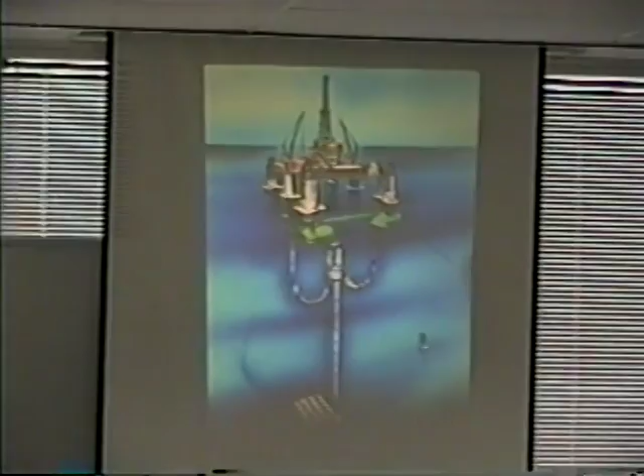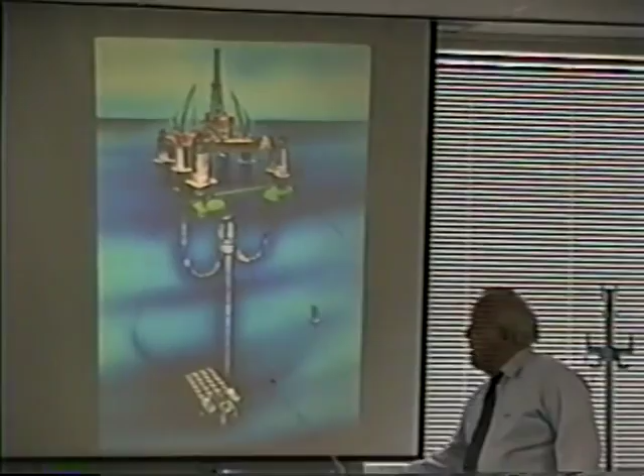It's set in water about 2,100 feet deep. It's a system that drills some wells through a template, and our part then was the 3-mile tie-in to a 3-well template, and to have 6 lines, 6 3.5-inch lines in a 28-inch casing, all insulated, and the umbilical, the hydraulic umbilical and injection lines were in the umbilical.

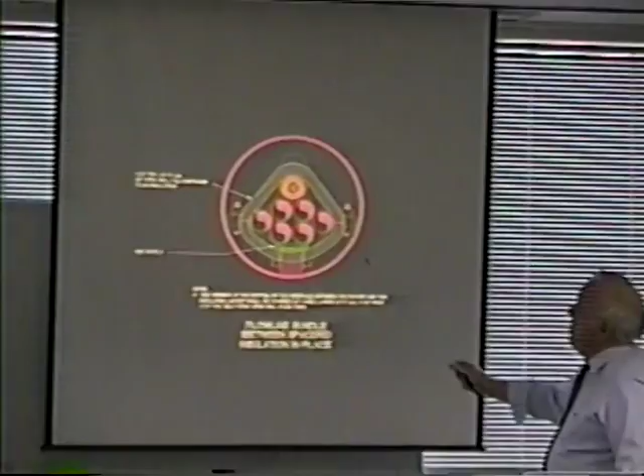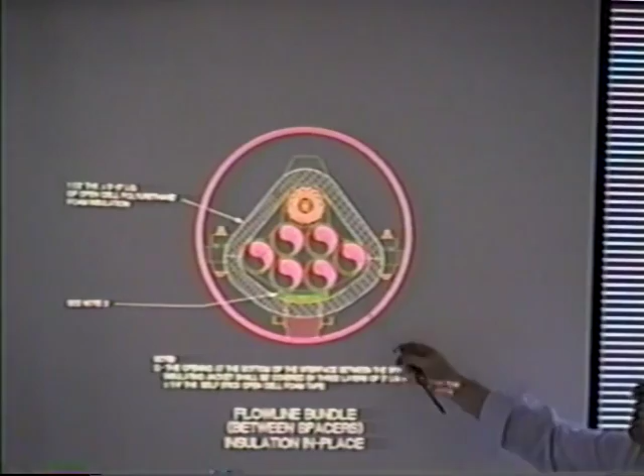The pipe bundle was made up of the 6 lines, like I just described, insulated in a 28-inch casing, and this was a high-pressure system. It's 10,000 psi flow lines, hydraulic umbilical. We had spacers about every 12 meters, roughly, and all of this is then in the 28-inch casing.

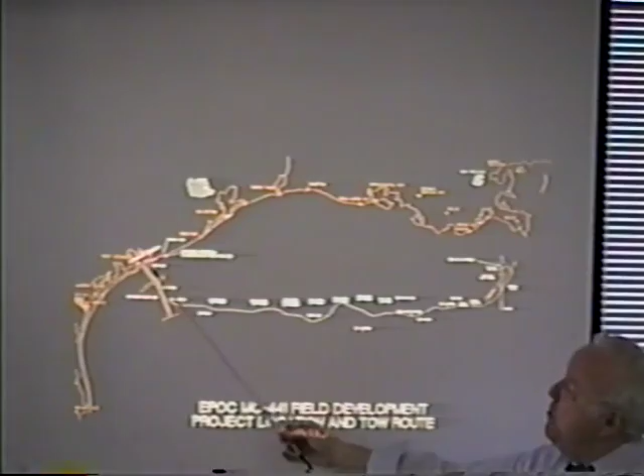We made this up at Matagorda. Port Lavaca sits here, Houston's here, New Orleans is here, and we towed about the equivalent of from Houston to New Orleans, actually a little bit further, about 450 nautical miles was the tow distance.

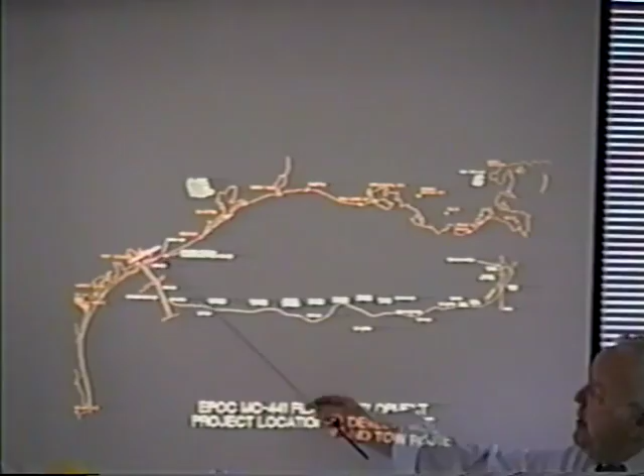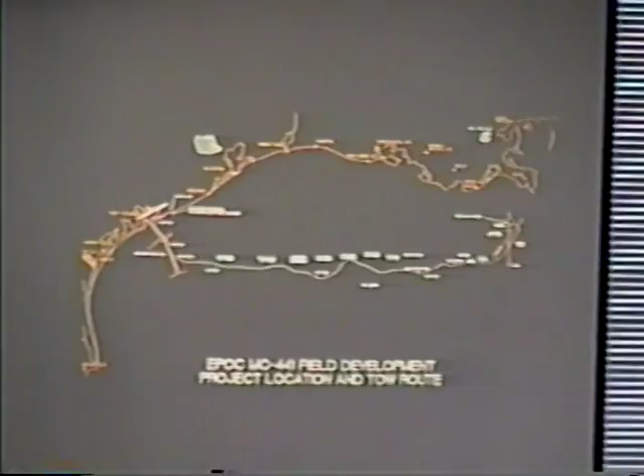The bundle was made up complete. We installed sleds on the ends, you'll see these, and then tested everything in place. After everything was all set, we then towed. It takes us about 3 days to get here. We're traveling at about 6.5 knots on the seabed. We tow everything on the bottom, and we actually passed through water depths of about 3,300 feet of this area, and then arrived in the production area.

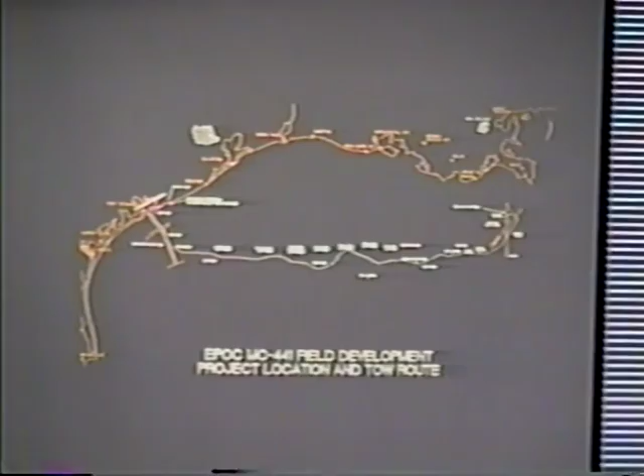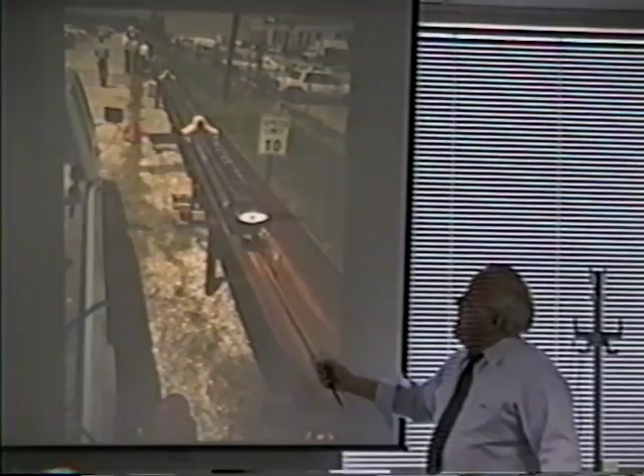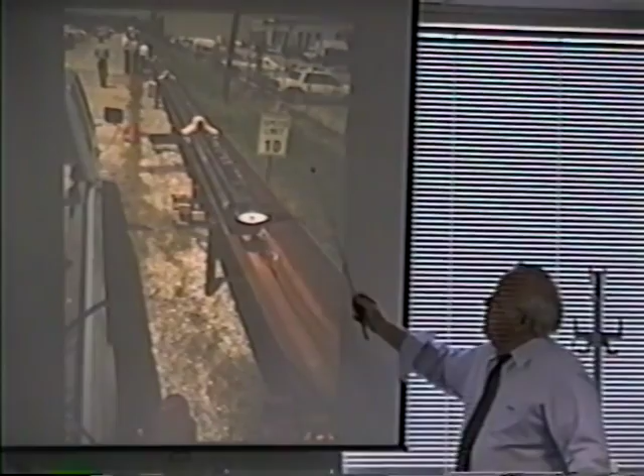Now, to make these up, we have to design special spacers that are about every 12 meters. And this is the test of the spacers. The spacers have wheels on the bottom, and we pull these back and forth on this 1,000-foot long track to test the wheels, make sure it doesn't get unstable, it doesn't roll, and make sure that the wheels hold up. We did not watch the speed limit. We kept everything running at actually about 8.5 knots, which is almost 10 miles per hour. So that was the development of the spacers.

Now, if you tow a pipeline on the seabed, you have to protect the bottom of the pipe, and what we do is we install an abrasion coating on the lower half of the pipe. Now, the advantage is you protect your pipe, and by not installing it on the top part, you save about $27 a foot. And by having the weight on the bottom, then you're stable and the pipe won't roll. So you have several advantages of using that. Actually, we get out to these sites and where the pipes are spanned, we can look underneath, and this abrasion coating holds up extremely well.

What kind of coating are you talking about there? Just say it's epoxy with sand in it, and it's called Seaguard. Seaguard, yeah. But Bob, I was kind of involved in that bit. I think that's in that Sigma coating. Yeah, Sigma, it's a Seaguard. It's a cladding that they put on, I want to say it was like a quarter of an inch thick, something like that. They also use it for boat decks, for walk areas. Right. But it's just epoxy and sand, right? Yeah, epoxy and sand, basically. It's the old Tide Guard too?

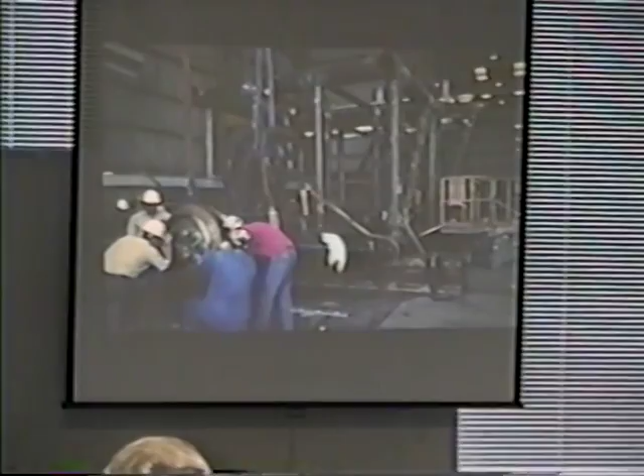Bob, what was the diameter of that 19-mile? It was 32-inch, and we did it the hard way. We put concrete on it, and it was cast concrete on the island of Khargu, right next to Kharg Island. And concrete absorbs water, so we had some very precise measurements to try to get this weight correct. It actually hit the water floating, and then after about an hour, you see it start to sink. You see bubbles coming up as it absorbed water. So we were on a very tight control there. This control is tight, but it's much easier because your steel does not have the absorption that the concrete does, so it's a lot easier to control.

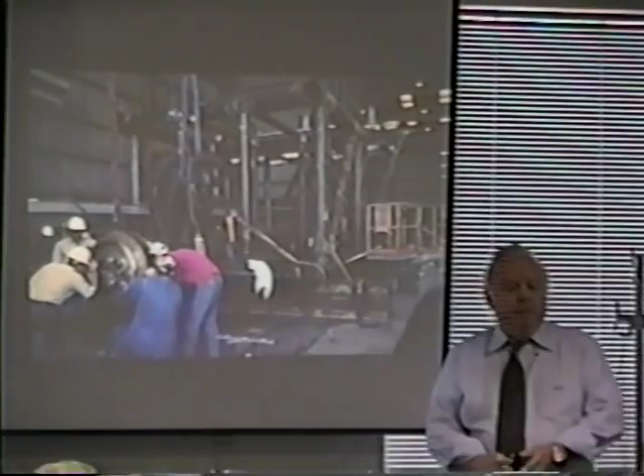Here's a sled on the end of the bundle. The sleds will weigh anywhere from about 12 to 18 tons up to, in this case, 75 tons. And we have installed a sled on the end of the bundle that weighed 140 tons. Now, the reason I bring that up is because we could use that sled then as, say, a 4-well template with some manifolding, where you do everything onshore, test it all, and tow it out, and you're there. Instead of having to carry it all out in pieces with very expensive spreads. Say the J-lay spread around 350,000 a day, and then your spreads to set the templates, to tie them in, it's really tremendous costs offshore.

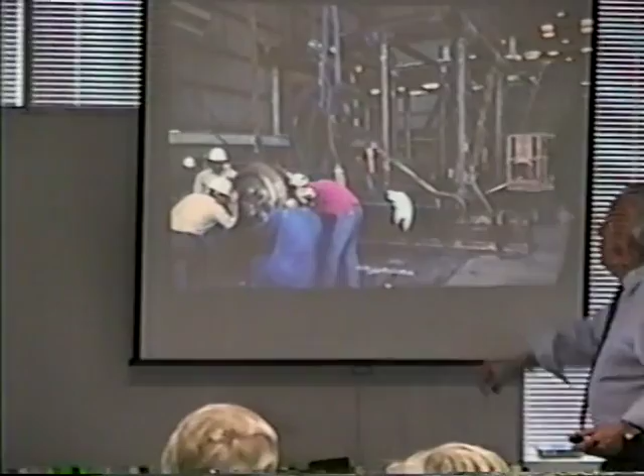This is our steel bulkhead at the end of the pipe bundle that ties into the sled. Here's that bulkhead, here's Gene, and the bundle, or the pipe as it leaves the bundle and then ties into the connection system on the end of the sled. Another shot of the bulkhead.

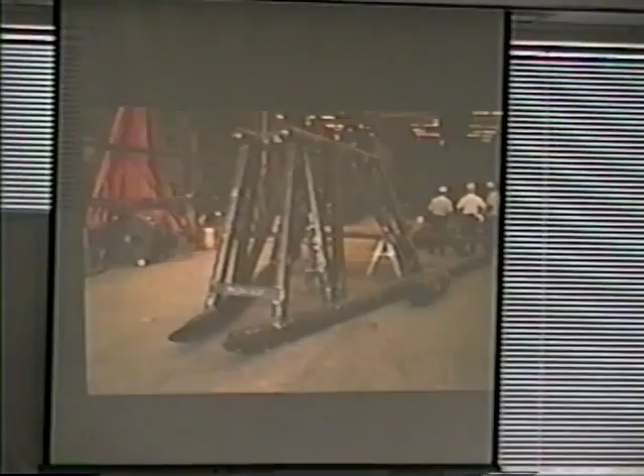Now, when we tow these bundles, we tow the leading end, and we actually pick it up, and we'll tow it in an envelope from about 100 feet off the bottom to 500 feet off the bottom. When you start off the continental shelf with your tow wire out, your bundle gets higher above the bottom, and you get up to 500 feet and let out some cable, and so we control in that area.

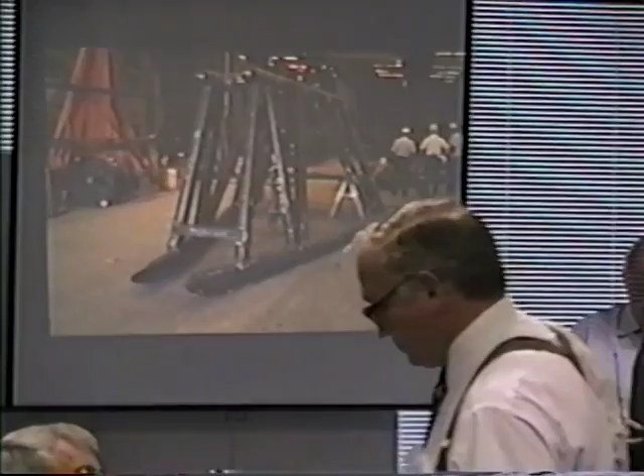Now, on the trailing sled that we're dragging, we need to protect it. Well, this is a cow catcher that attaches onto the area just behind the sled. So if we get up against anything en route, then we actually move the sled aside as it travels. There are a couple areas where we have these diapirs that are below the surface, and as they push up, they vent calcareous material which grows columns like concrete. And it's these that we are guarding against in this case, where it gets up against it and the sled will transit through the area.

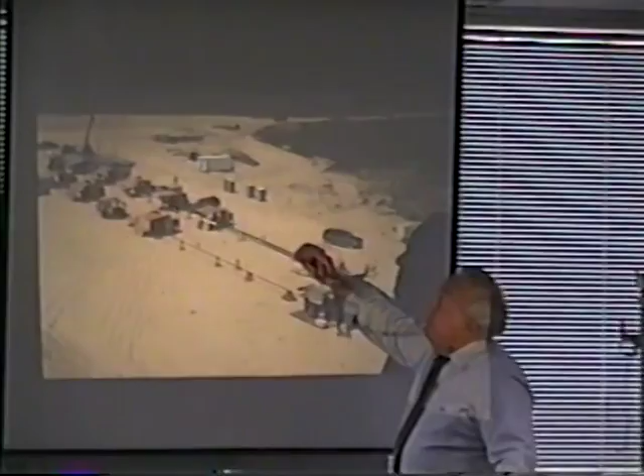This is the Matagorda site, and we have both projects going on at the same time. The green is the Enserch, the red is the Flextrend, and we have the welding stations. We complete a weld every 2.5 minutes. So the makeup of the flow lines themselves is a fairly rapid operation. We have the stringer bead, hot pass, caps, X-ray station, and the outhouses.

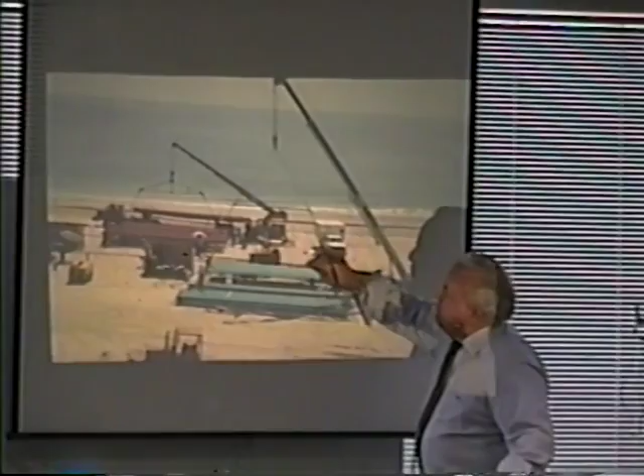Here's a shot of the pipe receiving area, and then right where we go to the stringer bead for Enserch and Flextrend. Another shot from the other side, essentially the same thing.

The Matagorda area is quite adaptable. We have beaches that there's no people that can drive to them. The Colorado River sits over here, and the Port Lavaca ship channel sits over here. So it's a remote area.

We bring everything in by barge, comes in over here, all materials, and the crews normally stay in Bay City, drive down to Matagorda, cross the Colorado River, and then are ferried down the beach.

What we do is we make these up in about 4,000-foot pieces. Once made up of 4,000-foot length, we roll it over onto the storage area. Then they hook up water lines on the trailing end of these. We do a hydrostatic test with the flow lines in the storage area.

This is about half the storage area. It goes about that much further off the slide. You can see the flow lines being made up.

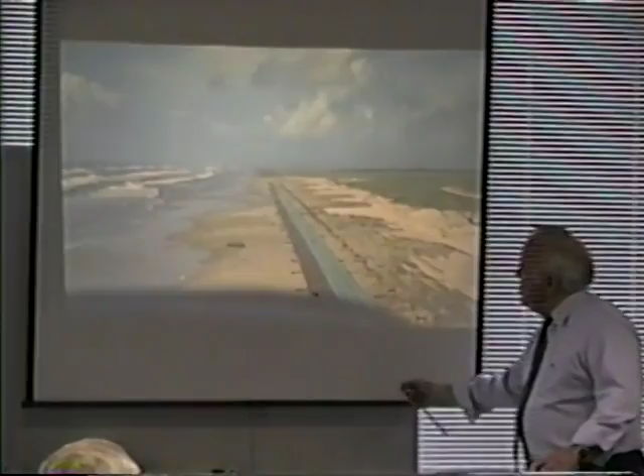Did you have to widen that beach, or is that natural? No, that's natural. You have to clean it up. Oh, yeah. Actually, what was interesting, I don't have a slide of this, is if you look at the area where we're working, it's very clean. And if you see the beach as it goes on further down, it's really dirty, a lot of trash. So we actually clean these beaches up in good shape to start with, to work on them. And then at the end, it's another cleanup process.

This is the casing. It's strung like you would string normal overland pipeline, onshore pipeline. Just string it, the abrasion coating on the bottom, and then we make this up just like you make up a dryland pipeline, except we don't have to have it on a lot of skids. We use styrofoam blocks just to make up on, and then just leave it laying on the shore.

There's our welding stations, stringer bead, hot passes, fills, hot passes, and cap stations. Another shot of that same spread.

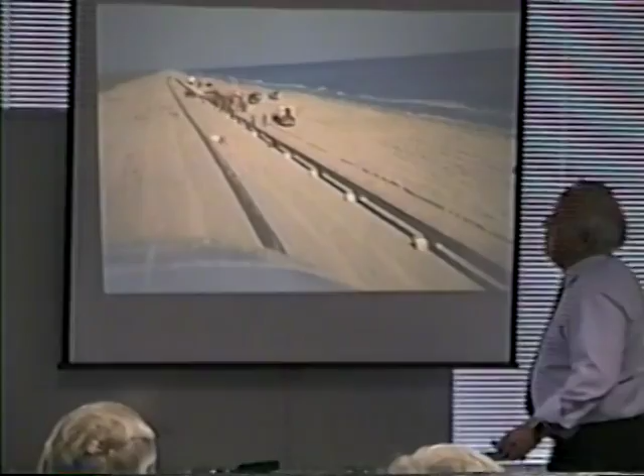Here's the Flextrend bundle, the Enserch bundle all made up. The flex trend bundle was being fabricated. The flex trend was 4 miles long, the Enserch was 3 miles long. These that we're doing now are 7.5 miles long, 4 bundles. We're looking at others now right at 9 miles long.

Once the casing is made up, then we fill the casing with water, hydrostatically test it, run the water out, dry it, and then we run a pig through it with a cable on it. Once it's through, then we put the cable on a winch, put the winch on rollers, have a load cell back here so that we can then start to pull the bundle sections into the casing.

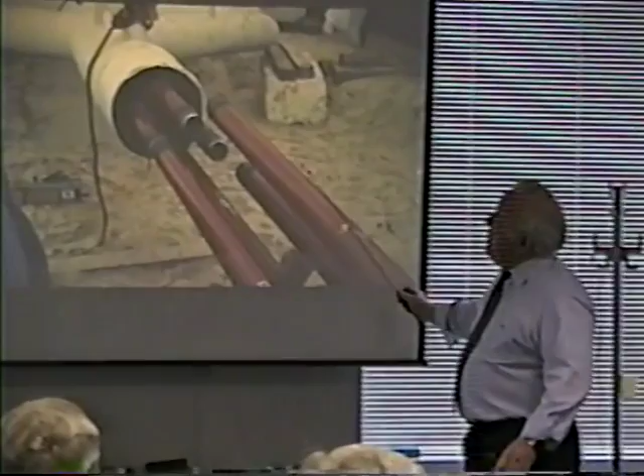Once the lines are all made up in the bundle, we then attach the lines to the backs of the sleds. So everything has been tested. This is the flex trend bundle. They're just completing the tie-in of the flow lines and then the tie-in of the casing.

These were about 15-ton sleds. These are much easier to handle, although we have handled up to 40-ton sleds, and we've been designing up to about 250-ton sleds. On those sleds, you can do all kinds of things. You can have your well templates, a 4 or 6 well template. You can have what we call a self-erecting riser on that template where it'll stand up. We've got all kinds of money savings ideas.

Another shot of the flex trend bundle with the flex trend sled. Now, we've switched back to Enserch. We've actually completed the flex trend, and here we're starting to pull the 6 Enserch sleds into the casing. This is the point that we have the 6 bundled together, and then we're ready to spool the umbilical on top of the 6 lines.

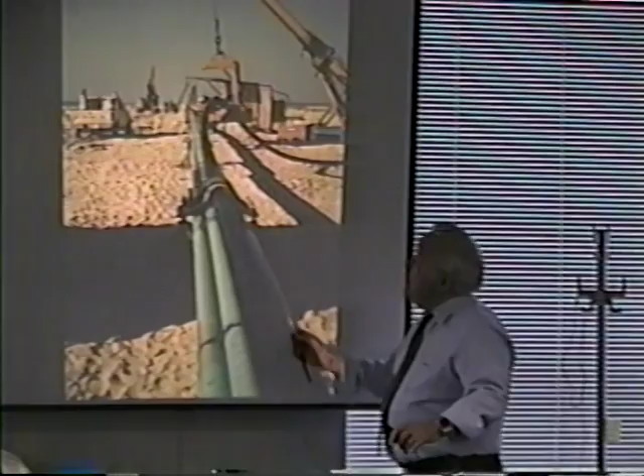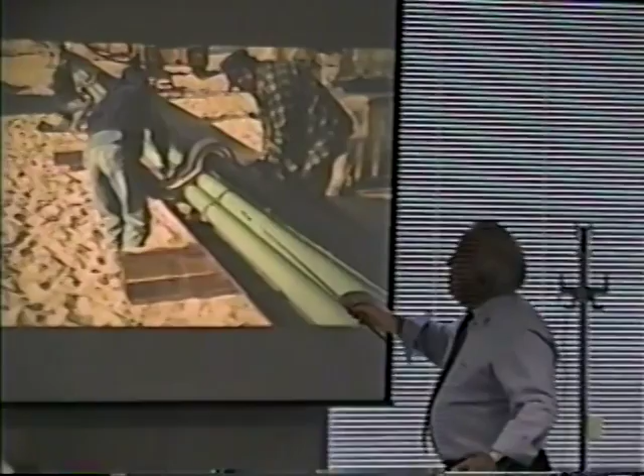Here's our cradles that wrap around the bundle, hold it in place. These were insulated, and then we insulated the lines themselves. Here's the umbilical coming onto the top of the bundle. Now we're at the stage where we're tightening everything down, ready to start to put the insulation on.

Oh, this you'll recognize, FSSL. Yeah. Here, Bill.

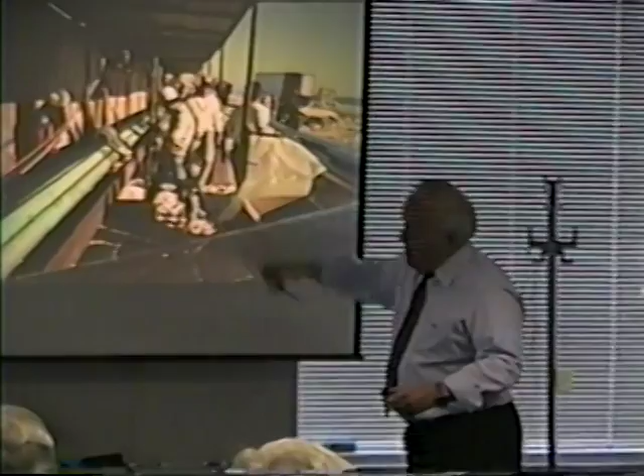We put a pressure sensor in this bundle, plus 6 temperature sensors, and this was the spooling then of this system into the bundle during the makeup. Here's the FSSL lines to the temperature and pressure sensor. Here's the insulation that we stored here, and then it's placed on top of and underneath the bundle. Here's how the sections go together.

The insulation is on the pipe. We banded it with soft banding material and then put duct tape on to seal it. What was interesting, we tested this on shore. Actually, we had tested a number of lines on shore, and we noticed during the day we'd have the bundle heat up and a big pressure change during the testing. In this case, with the insulation on it, we noticed very little difference. And it's showing that this insulation is very effective.

When we did the pipeline pressure test, you know how you always see them? Didn't budge. They could change 10 PSI, and that was on a 12,500 pound test. It was some ridiculously small amount, maybe more than 10, but it was quite extraordinary.

Yeah, once we got the Flextrend out there on location and hooked it up, their arrival oil is about 108 degrees, and they're saying it's very efficient, and they're saving about $1 million a year just in additives that they don't have to run in the bundle.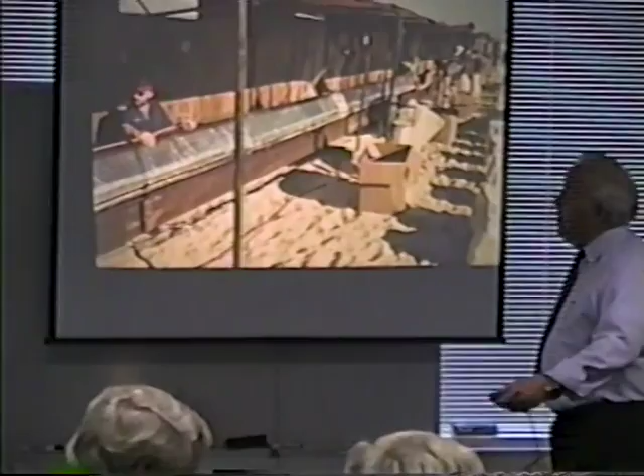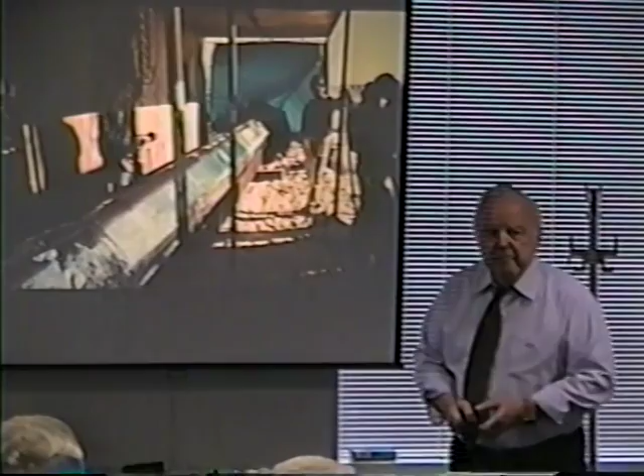Here's the bundle then being pulled into the casing. It takes about 15 minutes to make up the entire 160 feet. Get it all duct taped, the insulation, or the instrumentation wires on it, and then we make the hole, just about every 15 minutes for 160 feet. It's actually quite an efficient operation.

Here are some shots then of the Flextrend sled, the insert sled. This sled weighed 75 tons. It has 3 ports on top here that they installed jumpers on. There's a big difference in the connection systems.

In some of them, we'll bring the sleds in, like we did on the Pan-Arctic. You remember that one, we docked, and when we docked, then we placed collets, so the male collet within the female. Right. And an ROV went down and activated it and gripped, set, seal, and you can test your collets in place.

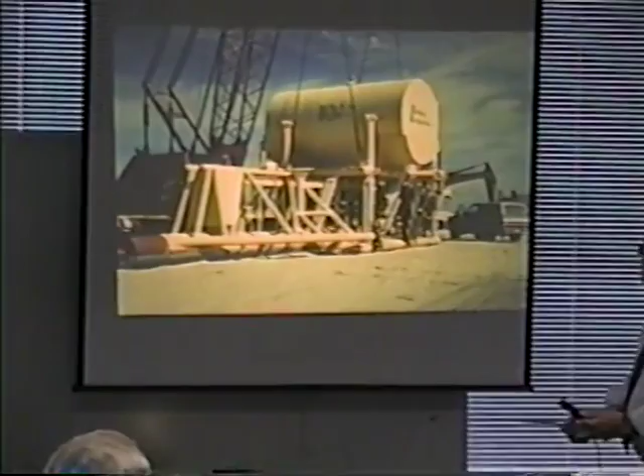This is the insert sled, the rear end of it with the cow catcher on it. The connection system is in front. The heavier the sleds get, the more buoyancy that we need. We keep the sled about 1 ton negative. In other words, it only weighs about 1 ton on the bottom.

The trailing end of the Flextrend sled with its cow catcher. The lead end, this is a little earlier slide. The buoyancy tank is not in place, but Flextrend was very close to the launching process.

On the end of the insert bundles, we had about a 2,000 foot long 14-inch pontoon. The purpose of it was to assist us during the connection process. If this is the template, we stand off, or we tow about 1,000 feet off, about 400 feet past. We then release these chains. You see the chains there, they're tied up, and we release the chains, and the entire bundle lifts off the bottom about 6 feet.

And with a 3/4 inch wire brought from the base of the template, we have it connected here. We spool in, and it takes about 3 to 4 tons of force to deflect this around and dock it at the tie-in point.

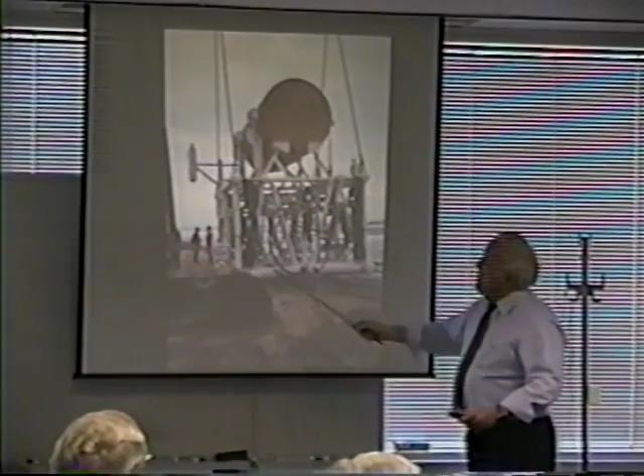Back to Flextrend, we just brought the cable to shore. We're starting through the process of placing the pipe into the surf and starting to deflect the sled offshore. There's the tow vessel. We've actually moved the sled over. The pipe itself is in the water.

Over the last 10 years, since '86, we've launched 10 lines, 9 of which have been between November and March. At first we thought that was bad, but now we find it's good, because once we get this in the water, the waves help us during the launching. You save about 12 hours during the launching process. The key is to keep a good winch, load saddle, and anchor on either end, so you always have control of it. That's the key point.

Another shot of the lead sled just prior to launching the Flextrend. The way they're launched, we set a couple of vessels up offshore with an anchor in front, and then we just winch the pipe laterally. If this is the beach, we winch it laterally offshore. When we get out to roughly 6,000 feet from shore, we then can get underway.

And we were just starting to get underway with this sled, and it's interesting. Earlier, we had a hard time getting them offshore, but we've now lined up enough horsepower that as soon as we put the power to it, we start leaving the beach high and dry at roughly 2 to 2.2 knots, and it's very impressive. I'm on the boats and Gene's on shore watching this thing start to move, and actually having to run to keep up with it.

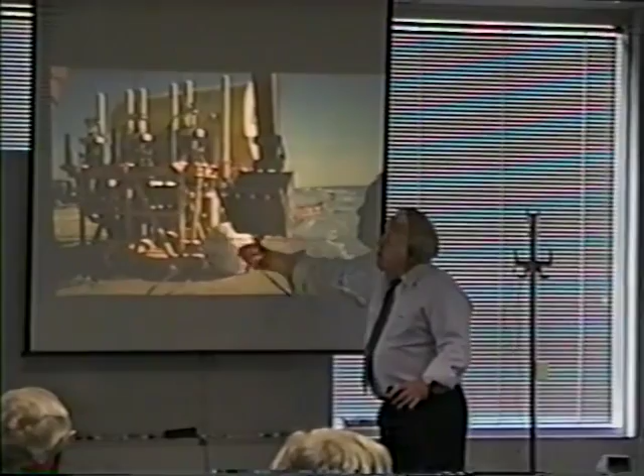This is the insert sled, and we've just gone through the launching process for the pipe. We're bringing a cable to shore to connect to the end of it, and then we'll be ready to start moving this sled, or launching this sled.

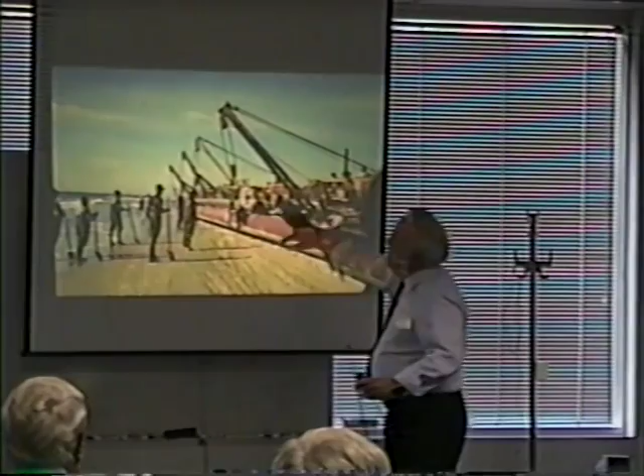The launching process where we have a pontoon on it is just a matter of riding your side booms up next to it, lifting it, and then booming down, and you have about a 10 to 15 foot move over. So it's just this process of moving the bundle over where we have the pontoon on. In the clear part, we use the regular cradles that you cradle pipe into ditches with on a dry land pipeline. So we're just going through the process of getting it moved over.

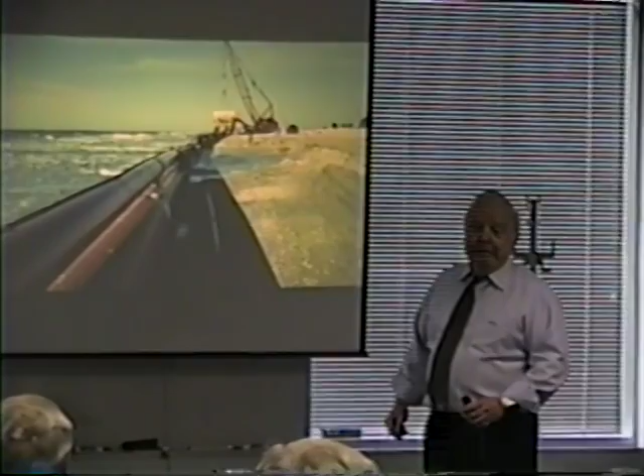Murphy is always against us. He always gets it tied at the wrong time. And this was one day that it really was fairly calm. This was in February, too. Yeah, it was really amazing. We like waves, but it took us a while to get accustomed to launching in waves, because you think, oh my God, we're gonna lose it. As long as you hold both ends, you're okay.

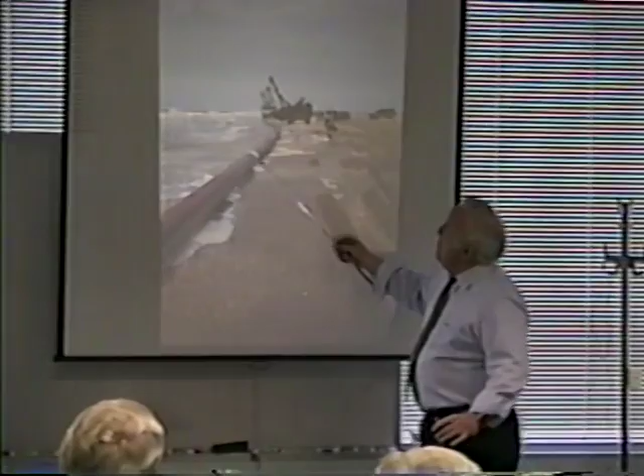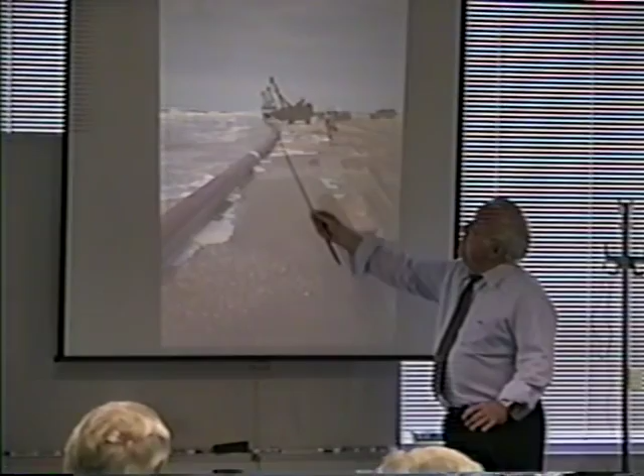Another shot from the other end during the cradling process. I took these pictures just to see where the pipe was going. This is the pontoon section, and the other pipe has really started to launch itself. We have our winch holding it in this location until we get it sufficiently deep in the water and until our tide comes in. When our tide comes in and submerges the bundle section, we have our buoyancy and we're ready to start towing. Start our deflection and then we're towing.

Here's a shot we took from the trailing sled. This is the cow catcher. This has been launched. We're ready to get the lead sled launched. And it was interesting, when we started to tow this from shore, you could just walk down the beach and see this bundle peeling right off the beach. When we got to this position here, the sled got underway at about 2.2 knots.

This is the lead sled. A lot of times this happens at night, so we put markers on, strobe lights, radar reflectors, so we can track the sled as it's being launched from shore. Now, early the next morning, we were at the point where we got the cable to shore and we're ready to start launching, get those sleds laterally deflected offshore.

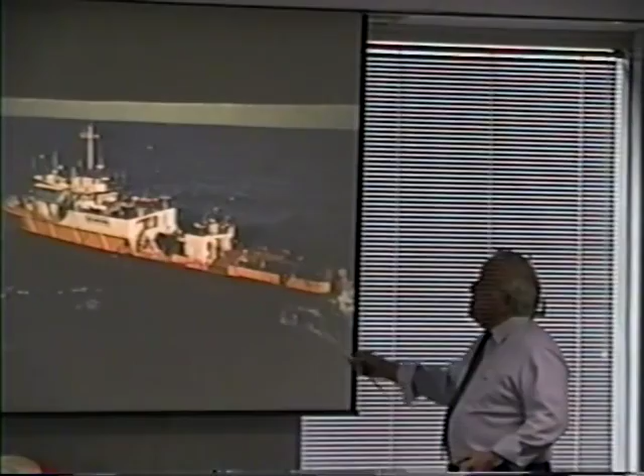All of the tie-ins, and we used Oceaneering on them. We actually used them for the survey and ROV operations. There's 2 ROVs on the vessels. The way we tow it, we have the vessel in front, and we let cable out to keep that lead sled 100 to 500 feet above the seabed. And this tracks the sled, so we have X, Y, and Z coordinates on it, so we know exactly where it's at along our tow route.

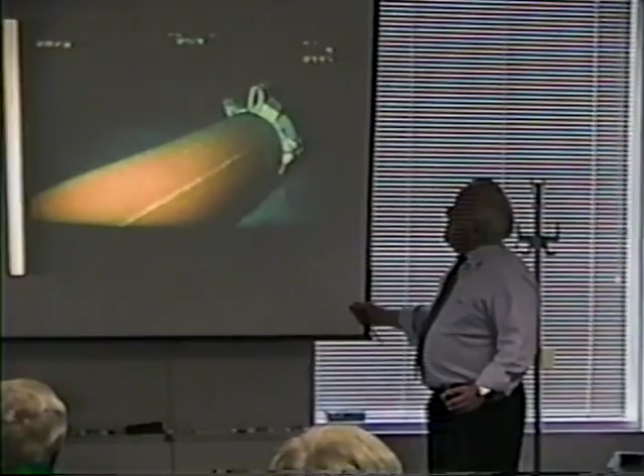Now we've arrived at the site, and this is just one of the shots. Actually, the pipe gets out there and it looks cleaner than when it came off the beach. It looks like it came out of the box from the factory. It really looks quite nice. Sled's the same way. These are some shots. This was at the 2,170 foot water depth, right opposite the connection points. Just took some shots of the sleds. This was the 70-ton sled.

We'd rig valves open and closed so that once we got it into position and confirmed it by the navigation system, we then would do an initial flooding, which added about 13 kips of weight to stabilize it, make sure it wouldn't move.

Here's the trailing end of the 2,000-foot section of the buoyancy pipe. This is the part at the trailing end of where we're deflecting from, in other words, 2,000 foot back. It stays in one spot, and we go through this deflection. Nice thing about this is that we leave this in a curve, and that's our expansion system. When it heats up, it'll expand and it bows out in a curve.

Here we're just at the stage of popping these chains loose, and this is the split second before it released. The chains deploy and it lifts off the seabed. This is lifted off the seabed from the last chain that was deployed, and it happens so quick that it's hard to get a picture of that.

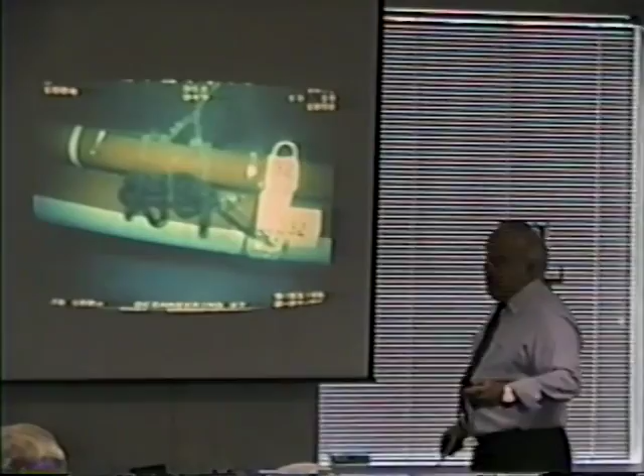Here we're off the seabed, probably about a foot. The chain's deployed. And that's probably 20, 40 pounds a square foot soil that you're looking at right there. That's why the chain went right in. Oh yeah. Another shot with the chain deployed, where it actually went over a little hole here, so this is spanned above the bottom. But she rides quite nice.

Now, if you can imagine, we got this 70-ton sled, and we've got a target the size of about 2 of these tables, a little larger, 8 foot square, and that's our target. We're a quarter of a mile straight up, 2,100 feet. So our objective is to put this sled into that square. And as we start deflecting it, if it isn't tracking right, if it's tracking ahead, we lower this from the surface.

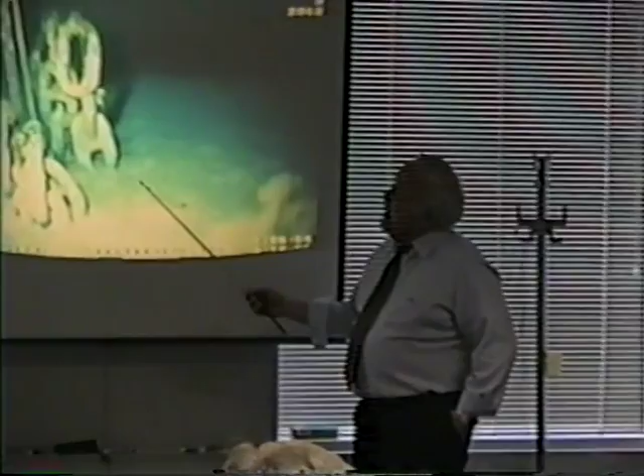Now we've taken a supply vessel, lowered a 3/4 inch cable off of it, connected it onto this sled, which weighs 1 ton in water, 70 tons in air. And we've marked the cable on the back deck in feet, and we're standing behind this with the ROV, and if it's tracking in the wrong direction, we say, raise it a little, raise it 2 feet. And with the ROV, you can see it just lift up 2 feet, and you start deflecting it, and it changes your track of travel, so that you're aiming at this 8 foot square, about 1,000 feet away.

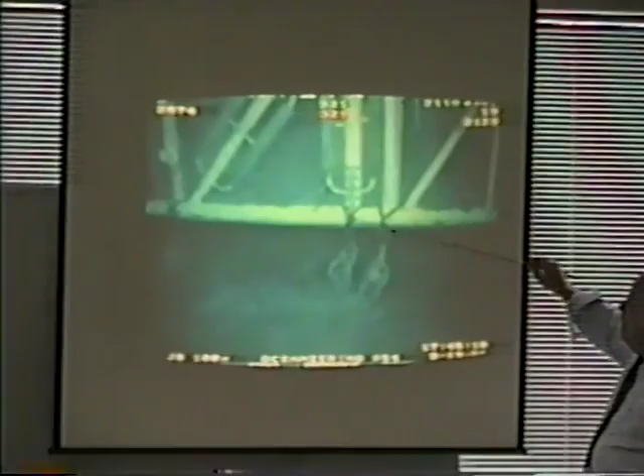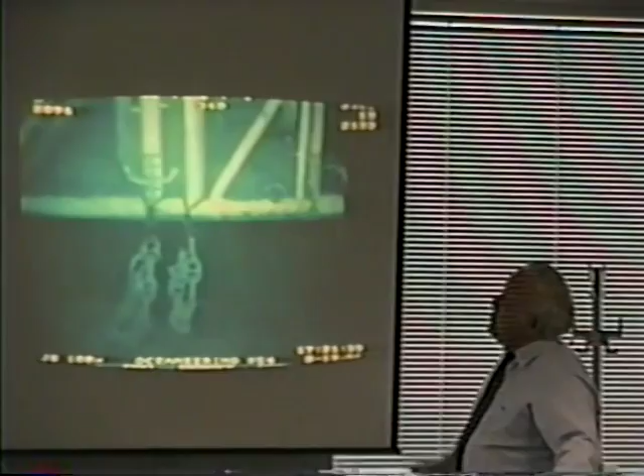Here we're going through the deflecting process, and it was at this point that we said, well, it's not tracking right, let's raise it 3 feet. Here we raised it 3 feet. We track it some more. If it still isn't tracking right, we readjust the height above the seabed. Now here, in this case, we started to get in too tight, so we said, raise it up more, and we got this to where the chain was just barely touching the bottom. Here's our 3/4 inch deflection cable.

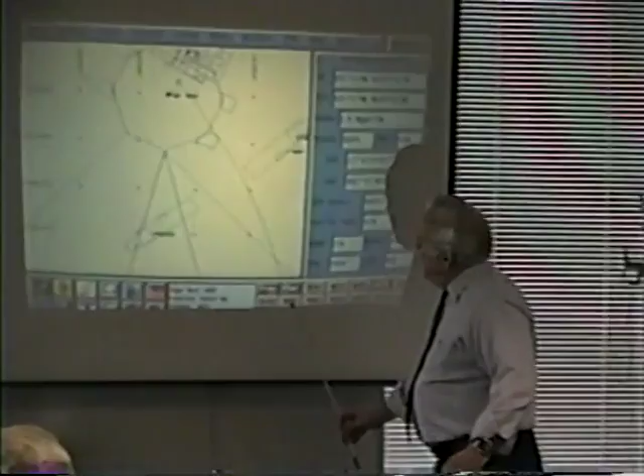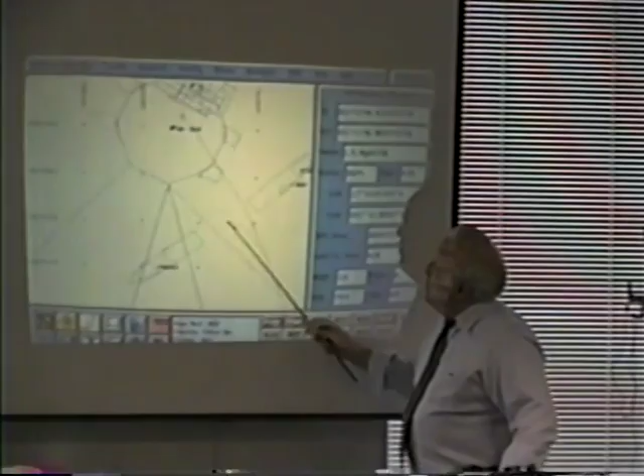We're looking at this on the vessel, and here's our line that we're tracking. We want to hit the square underneath the semi-submersible. Here's the mooring lines from the semi-submersible. This was the vessel that was holding up the sled during the process, and this is the ROV vessel with the ROV behind the sled and just watching it. And so we're tracking it along this line.

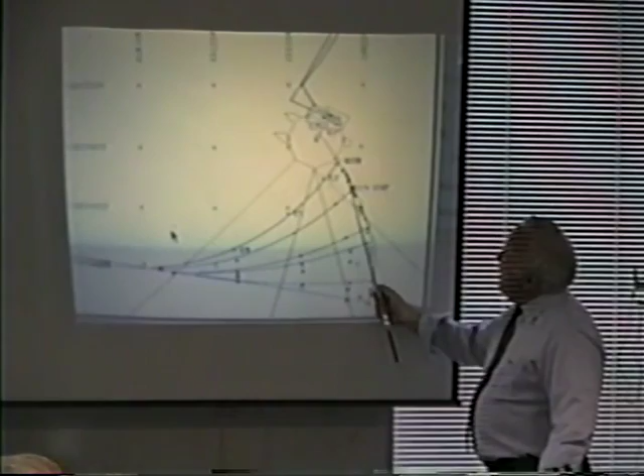And when it starts doing this, we lower it a little, we raise it some to get it to advance, so we just are watching the track as we're going towards the target. Now, once we land in the target, it's confirmed, and we flood it, stabilize it, get it all set, and then these are the jumper connections that are installed to connect the bundle to the template.

These are very expensive. If we look at the hard docking with collets, it's a 1. If we use the MacPack system, it'd be about a 2, and the jumpers are about a 5.

But some people are kinky for jumpers. Bob didn't agree with the owner's decision in this case. We'd have never known. Y'all pick that up? Well disguised. These are salesmen.

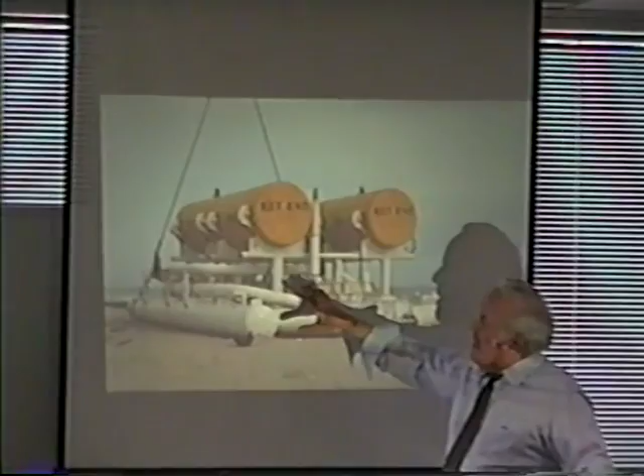Yeah. You gotta understand, this is our Placid sled. This weighed 140 tons. This thing, we've shown that you can launch, tow, position this. You can have it on the lead end, you can have it in the middle. You can put a 4, 6, or 8 well template on here. Manifolds. In this case, this was strictly a manifold system. But another shot of that sled, and that's it. Be glad to answer any questions.

Okay, yeah, one thing I just mentioned, Bill, that video, I forgot to bring one over here. I was over at a meeting, I didn't show it. We've got that little 8-9 minute video, everybody here might like to see it. We used it at OTC, and it was also about this same bundling. It was similar to what Bob's just showing you. There's just a little animation in there on some of the tracking, which makes it a little easier to understand how it's done.

You lent me a copy of it, did I ever give it back to you? No, I just gave it to you. Bill has yours then. Okay, we won't go into this anymore. We'll talk about that later.

Hey, any questions? Yeah, when you take your bundle out there before you start deflecting it in, what type of tolerance do you have for positioning it? Yeah, that depends a lot on distance. The further you get away from your connection point, the larger your target is. Say 50 by 100 feet would be a normal typical target size, 800 feet away, but if we want a larger target, we move further away. In fact, we always are switching the targets. And we have a model at our office so that when we actually tow in, we've done all the deflections modeled ahead of time. So we establish our target, where it should be, the size of it.